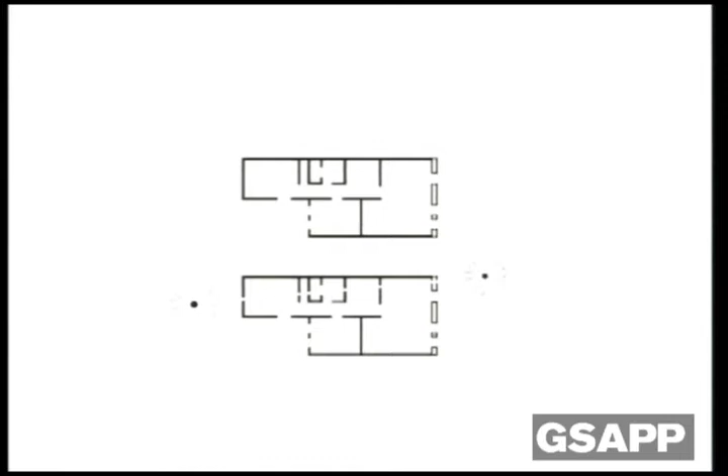I made a hole, 45 centimeters, just some hole that crosses 7 walls, and began to create a different experience with this house that becomes a gallery, and then becomes a new experience through this little hole. So finally you can have these little circles like a painting, but when you're in the center, you begin to have a relation with the different spaces.

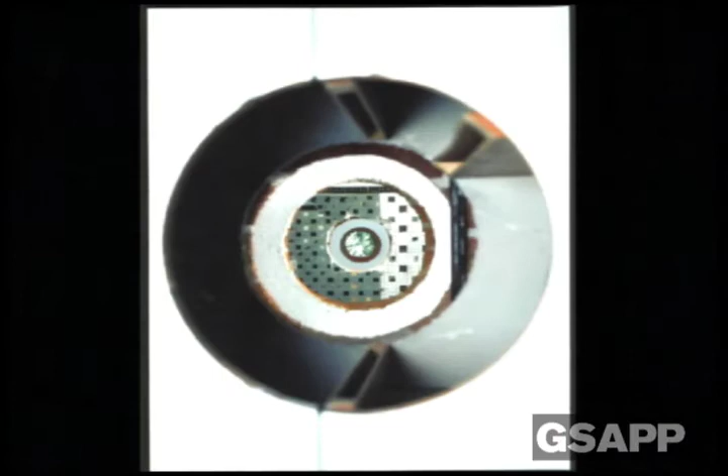The idea is how you can even use the closet or the bathroom and see the tree, and see the different spaces and light in the spaces. The idea is how you can touch, through the view, two different trees, even though neither tree is in the house itself — one is in the street and the other is in the neighboring house.

My first important project came when I was asked by the first government of the city of Mexico — Cuauhtémoc Cárdenas was the first left-wing mayor of the city. He wanted a young man to make something for marginal people in certain places. So we began to work on some spaces with almost no money, but finally, after 5 or 6 projects, he decided to give me a school for the blind and visually impaired.

This was important for me because first of all, it was a big and important project, but more importantly, how can you make a building without sight? How can you work with the other senses? For me, it's important to have a concept for the building, and I began to ask: how can we create effects of smell, of touch,

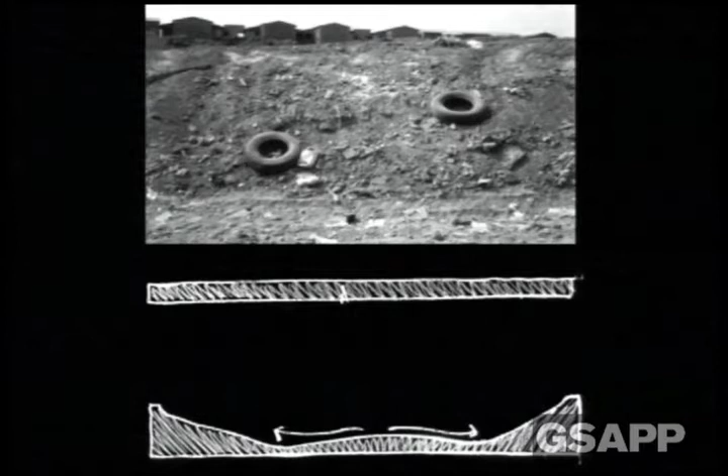So finally we chose this land, here, and we had our first problem. The kind of thing I like to talk about is how we work with a problem — in this case, we had 1 meter 80 centimeters of garbage from other construction. It was like a corrupt arrangement between the people and the government to leave all this construction garbage here. I didn't have the money to remove it all, so I decided to move 70% of the land to create a new territory, a new topography for the place.

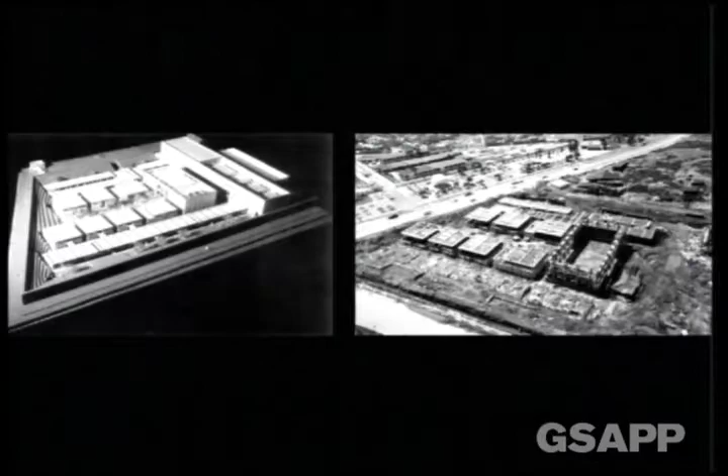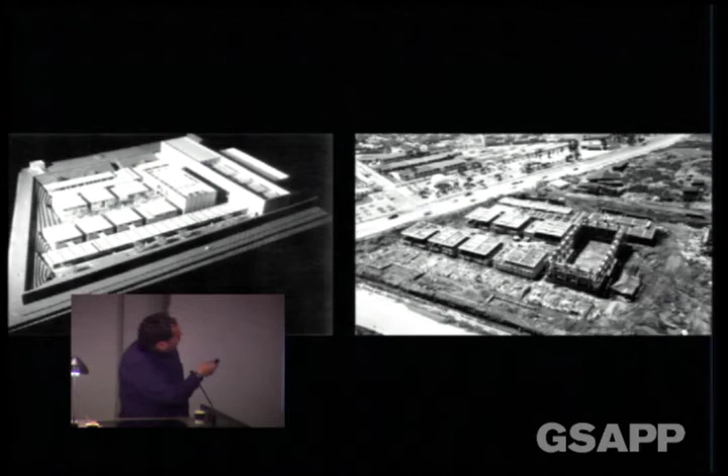So, here is the construction. We made a very big wall with gardens, and built a very rational building. I have to confess that in the beginning, when I made this model, my friends, artists and architects began to say, well, this isn't an attractive model. They didn't say, wow, what a nice building. I was worried, I think so.

But finally, one day, the director of the ONCE, the Organization of Blind People in Spain, came to give money. He was blind, and we took off all the roofs of the model, and with his finger he began to walk through the place, and then he said, oh, nice space.

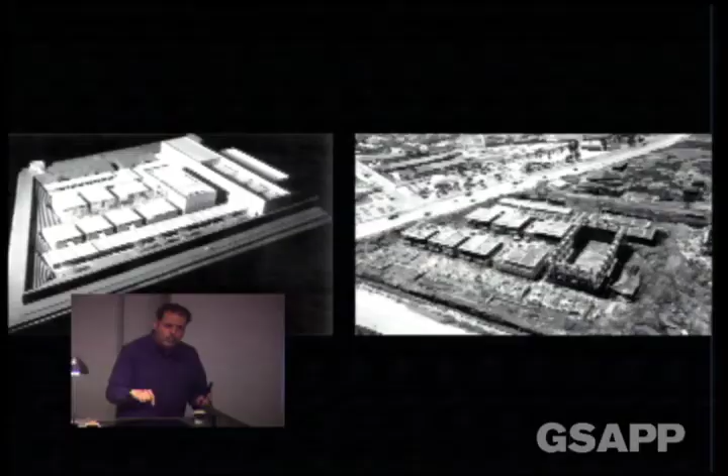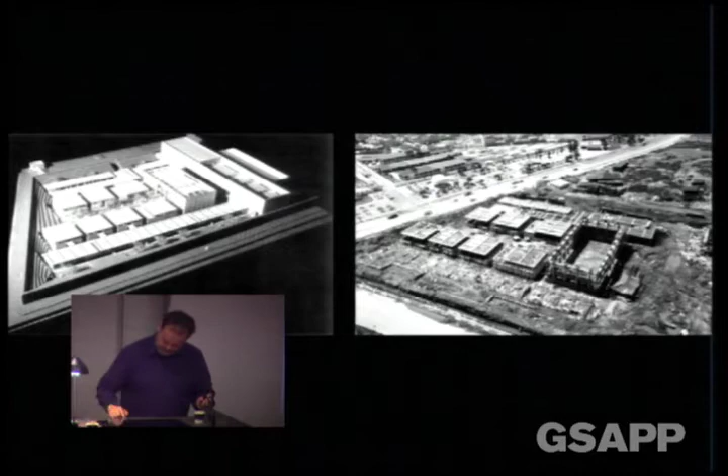He came to view, and here is a patio, and here is a stairs that you can go from one part to the other. So he begins to have experience with the space, and I begin to understand that maybe I was not wrong with my first ideas. So here is the building.

You don't have windows like a traditional building. We begin to work with other materials. Tepetate is a land material, but it's almost like a stone. They use it in the center of Mexico for making houses of 1 or 2 floors, and we use it for 14 or 15 meters high.

We begin to use the condition of some material that is the skin, in this case the tepetate, and the structure inside that you can see. So finally we can begin to use these traditional materials in another way. And the stone, the volcanic stone that is in the floor in Mexico City.

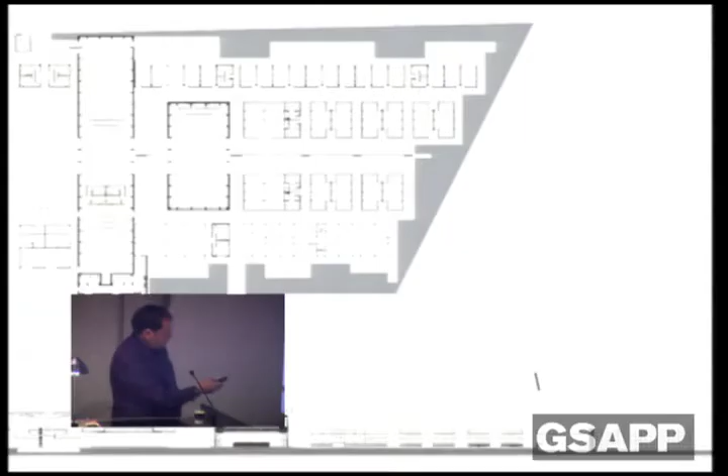I will not talk a lot about the building, but finally it's about how you can really cross and see different spaces, like a very important plaza or patio, and then how they can have their own vegetation and patios. Here you have more of a public space, like a mixed space and a private space, and a sports, cultural, and pool space, like a swimming pool.

And then finally you have this line about sound, because all the water comes and breaks, and sound depends on where you're crossing the spaces.

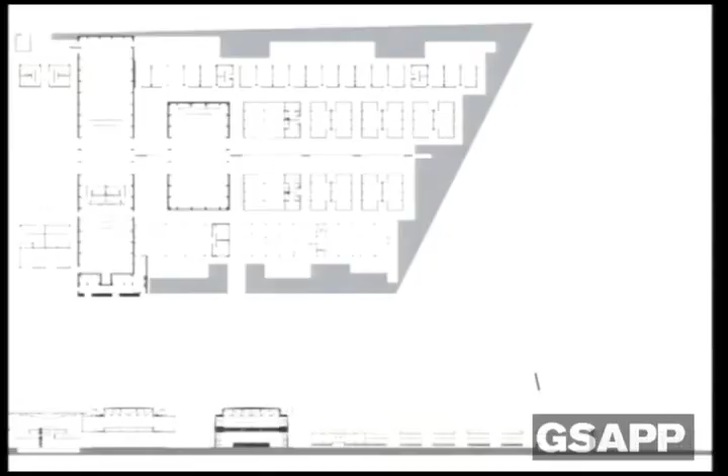The experience, how can we have different textures in the materials with not that much. I love a lot what Louis Kahn says about using not too much materials, and how with only 3 or 4 materials we can make stone, tepetate, and concrete to make the light about different heights and different experience with light and shadows and textures.

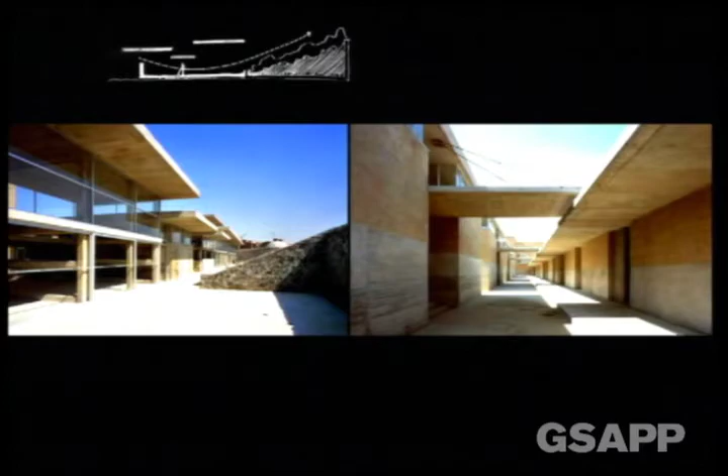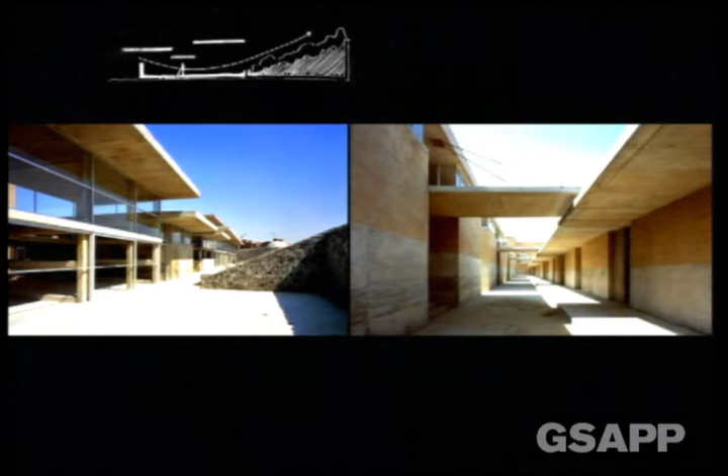That's why we use this kind of different heights, 210, 36, 45, to begin to have this space for the flowers, for the smell of flowers that we have here, and then some kind of skeleton that has more windows when you have this public space with mixed people, family, and professors that can see in this space, and then where all the blind people can have more the education rooms, and then here is more dramatic, the idea about shadow and light.

Here is the plaza, and here we have the water. When you cross, the water sounds, and you know that you can cross where the water sounds. And then you can sit with the shadow of magnolia that has some smell, and just have a good time there. It's nice when I was with all these blind people talking about the story, to be there.

Because they cannot see an image, so it's nice how they say, I like this story. So finally, we begin this with that.

And then how can we make some texture with this material? They can just feel it and don't fall around, because the government says you need to put something here so they cannot get to the water. But finally, only with this texture, they can really stop and know it's not a place to walk.

The idea is about the same roof with 9 columns. In some cases, depending on the programs, you have windows, because here you have a gallery. And here you have the rooms, the workshops, and then here maybe you can have light, but not like a traditional window, and then you can cross air and have the different spaces for the different workshops.

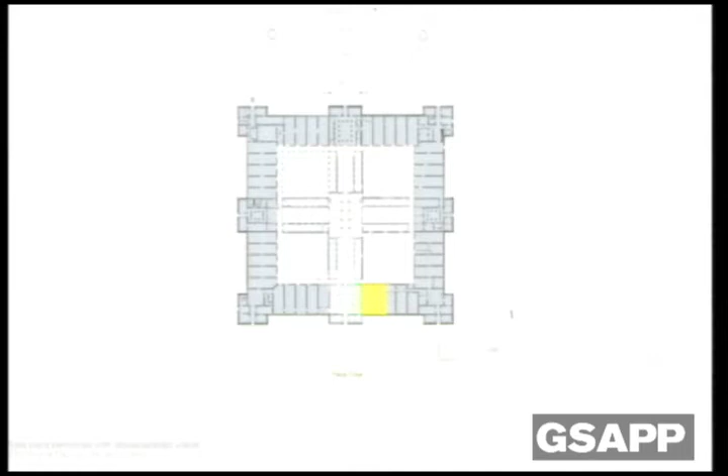This was 10 years ago or more, but later we had a new experience with blind people for a library in a pre-existing zone. It's a building we made, that became a library designed by different architects, making a new experience, and we decided to make these 2 spaces for blind people. This was the first space they had before—it was a terrible condition.

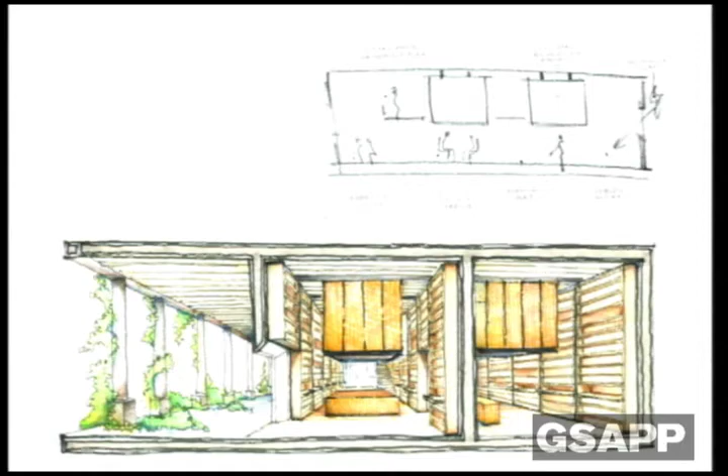So finally, they asked us to make the library, and to not make columns. One more time we make these boxes, so finally the people can be here to make a sound book inside, and then can walk on the first floor. We make, one more time, a garden with the smell that you can hear there. It's important that all the people, not only the blind people, go to this place, and it's a possibility to have a connection between not only the blind people, but all the people who go to all the libraries.

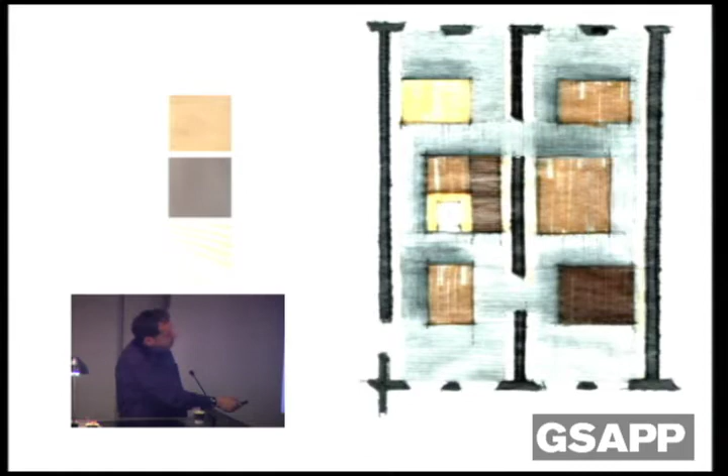And finally, we have this space for blind people. We use different colors in the wood to make a different experience, and then we use yellow—they can really see the yellow. So finally, it's like an abstract painting, but they can really use the lines to help with the steps. And with some braille, they can even read some lectures here. The child can be in some places in the yellow—so maybe the blind child, or maybe the child of a blind man.

And we even made the furniture for the people. And then we used some sound here, because they asked us to make some artist pieces, but finally we only used sound. So we had 9 sound artists make some pieces, so people can really ask to hear the piece, or even hear other poetry or other books.

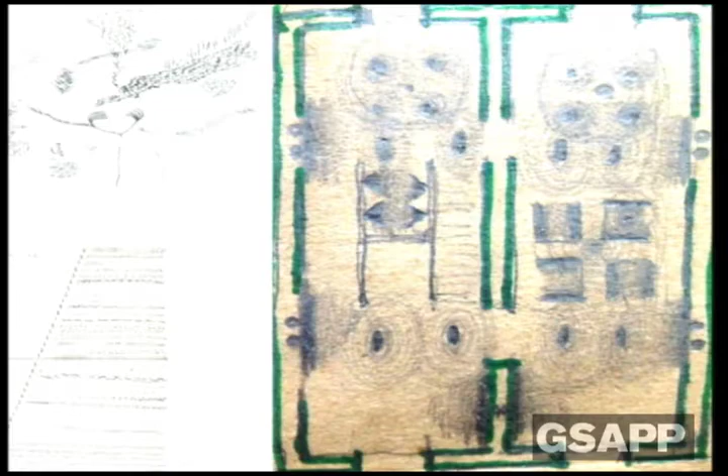They are acoustic walls, and there is the inside—how they really work with sound control. Here are the drawings. My brother is a sound artist, and he was the one who invited other artists to make the sound in different places.

We made an intervention, an ephemeral intervention, in a church that is now a museum. They wanted to put out the floor, because they put this floor in because, in Mexico City, everything sinks down—it's the lake. So finally they said we don't care if we don't have a proper floor, but we need the original floor. And the curator told me I could use this material to make something.

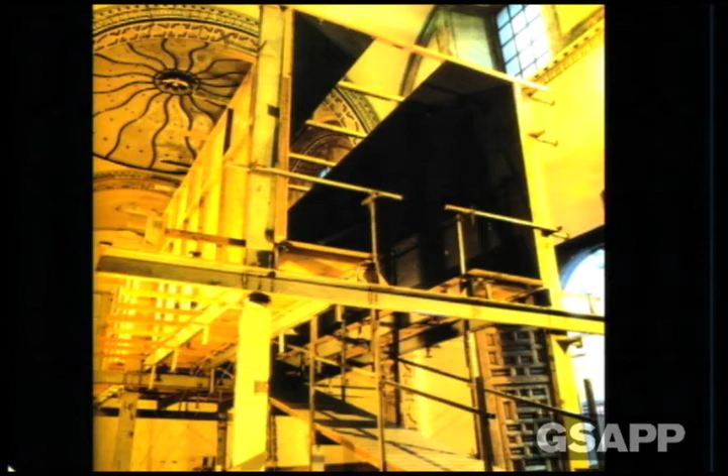So I used the same material, just moved, and in 2 weeks, with the workers of the place, I made a connection between all these pieces, and made these tents to make this piece that people can walk inside and have a new experience with the place. The idea is how, with the same material, even with the same workers—people who just work for the museum—you can make something that works without money.

This is a building we made for a poor area called Milpa Alta. It's a warehouse, and we used the stone of the place, the volcanic stone. The old houses are made with stone.

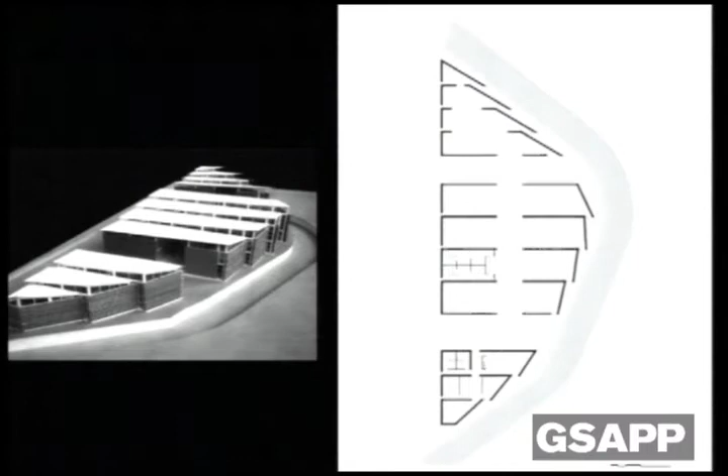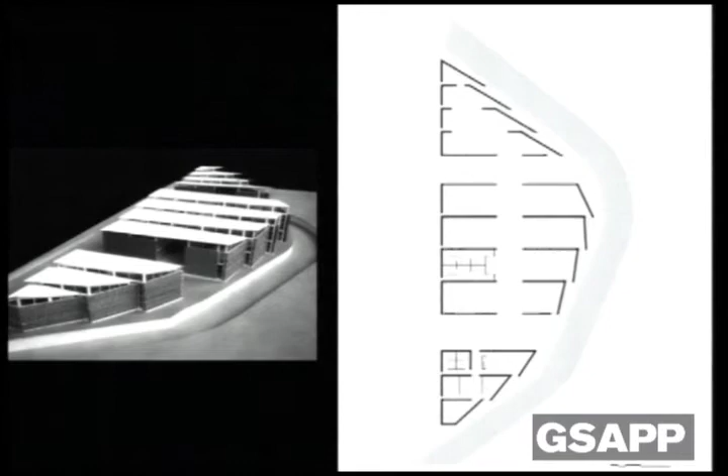So how can we make a warehouse with this material and with light roofs, not expensive, to make a place for the carpenters and painters and the people who work for the municipal place, because this is a water canal. How can we use the most space, and how can we have the north-facing light most of the time? Finally, we used this material one more time.

The skin is important, no matter if the resolution isn't good. The important thing is to recognize some skin. The idea is this is a very chaotic place, everything is changing—this is the sea you can see in the place. So finally you need to make a strong building for that.

This is the interior, and for me this image is very important because of how it works. One is the skeleton, the little vertical points, and then you have the vertical elements that are the stone, and the horizontal element that is the light—the lighting roofs. The light and windows are the connection between all the materials. Finally, you can see how the place works.

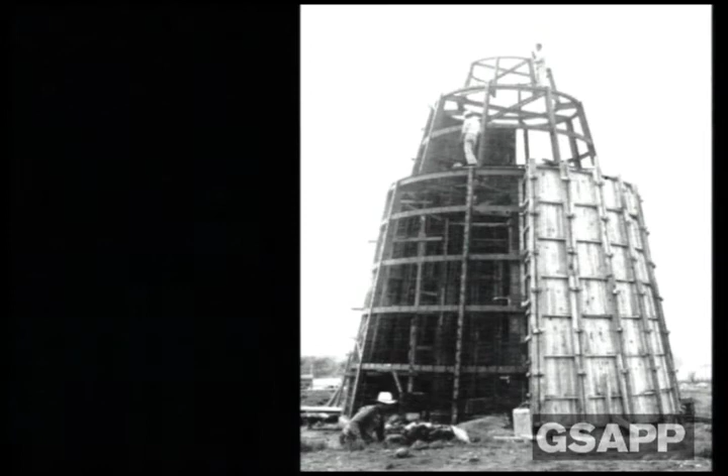Outside you have to be very careful about security. This is not an intervention—this is a photograph of the process of a beautiful sculpture on the Ruta de la Amistad in Mexico City, made by Fonseca, a Uruguayan sculptor. But I loved it, and some curators began to ask to create an artist experience inside the sculpture, because it's empty inside. So I decided to use the same material.

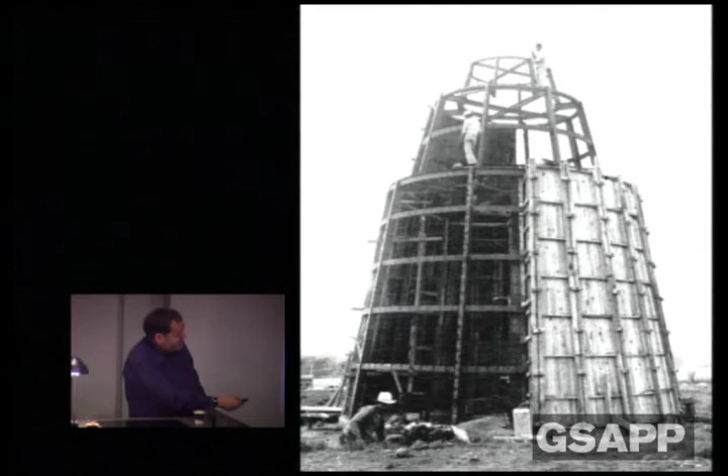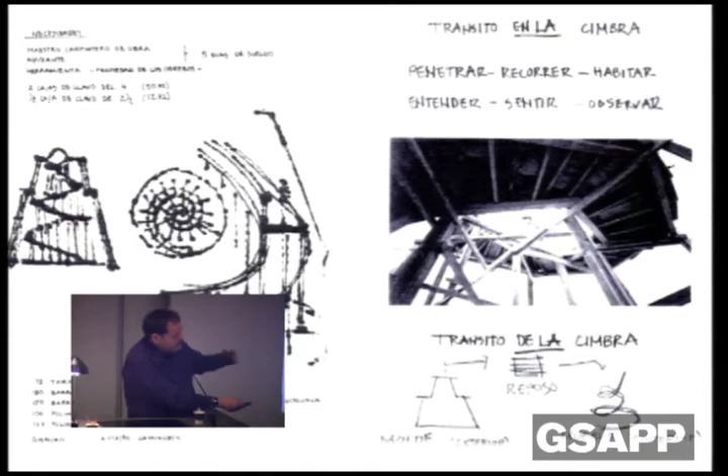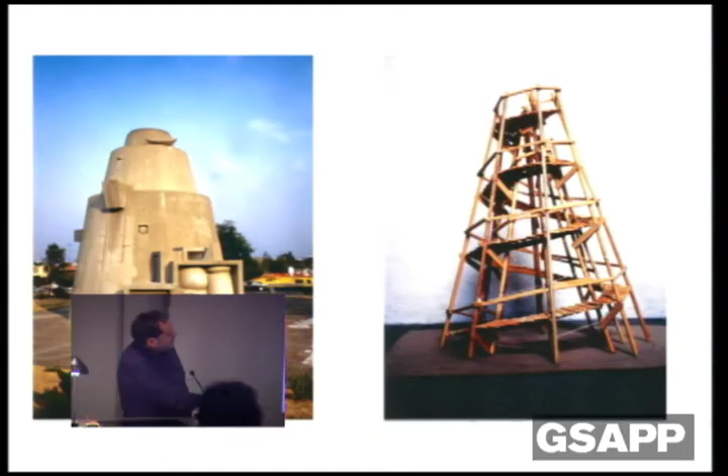I asked a constructor to give me this material, the wood, for two weeks, and he only told me: don't cut it, only use it. Finally, we made a model and built it inside with two people in a week and a half—the opportunity to make these stairs to go to the top, but not only to go to the top. The idea was how to finally have the experience of working inside, and how to make all this happen.

Only the rules—the concept of the rules—and then the worker begins to find the solutions. Because of that, I began to understand that if you have a strategy and concept to make a building, it works. They asked me to make a market, and I decided to make it as a tianguis.

And how can you make the tianguis? This is the place, and the tianguis is about using horizontal platforms so the wind comes through and the sun doesn't get inside. Finally, how can you use 6 by 6 square elements at 3 different heights? If you use 3 different heights, you can even make 10 different models, and it's the same building.

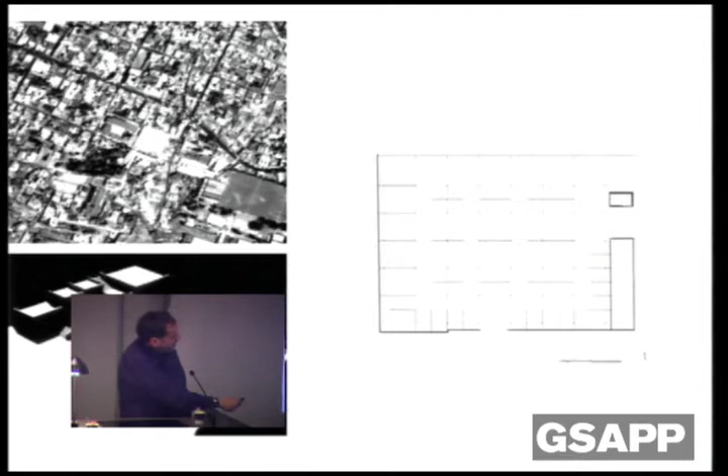Finally we made the building. We only used louvers on the west and the south, but at the same time the wind comes between the northwest and the southeast, so all the wind can come through the louvers, but the sun doesn't get inside. In the east and the north the sun comes in. Finally you can have very nice light.

They don't really need to use artificial light because they have such nice natural light. In the other condition you have these accent roofs, and at the same time you can have this accent in the interior of the place.

It's important to say that even in Milpa Alta, all these informal houses are growing and changing all the time, because people get more money to build up more floors. So finally you have the same vibration between the whole city and the building. So how can you make a contemporary building in these informal zones? It works.

Finally, it's a contemporary building, but at the same time it works with the program and with the texture of the fifth facade of the city.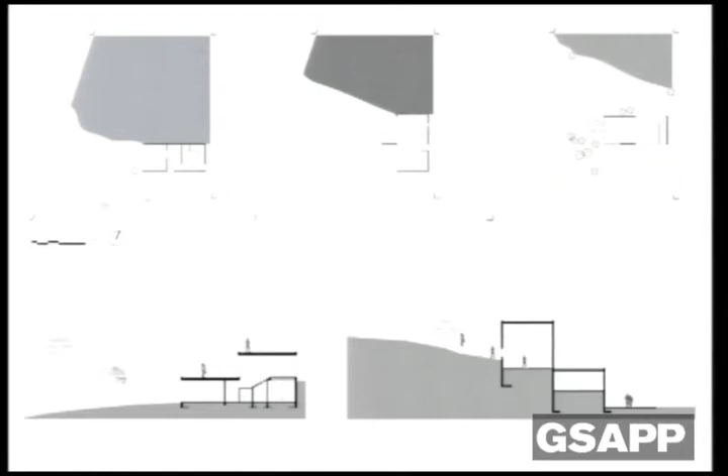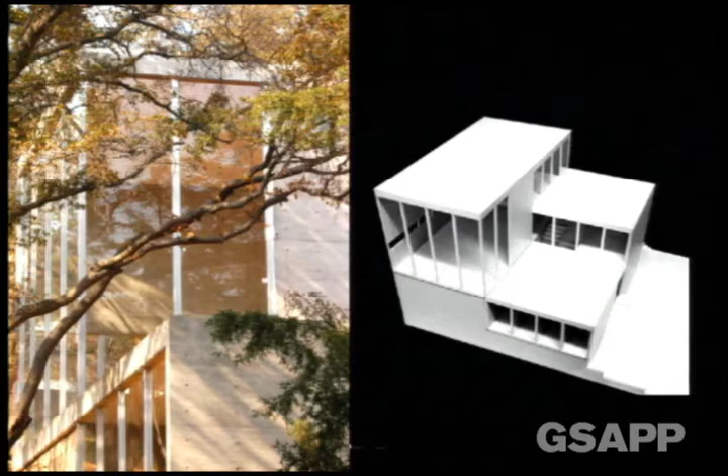Casa Saavedra is a little house we made with 2 materials, only structural windows and concrete. Once more we used a 6 by 6 module, making 3 by 3 steps following all the topography. Finally, we made a house with one modulation, where you can go outside on every roof, really matching the texture of the topography of the place.

The idea is how important it is to make—and to understand—the skin with the skeleton, and how sometimes you can open the concrete and see the elements that are really doing the work of the structure.

The School of Plastic Arts in Oaxaca was created with Francisco Toledo, an important painter who works a lot in Oaxaca. He invited me to make this school at the University of Oaxaca.

This is a rammed earth building. We decided to use rammed earth, working with the same people in Arizona who build for Rick Joy and other architects, and asked them if this earth would work in Mexico. Even in Mexico there are earthquakes, so we had to study how to build with these conditions. Finally, we made it work.

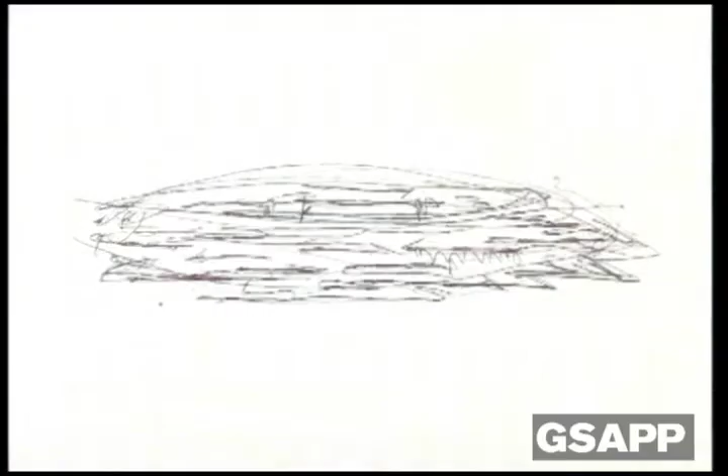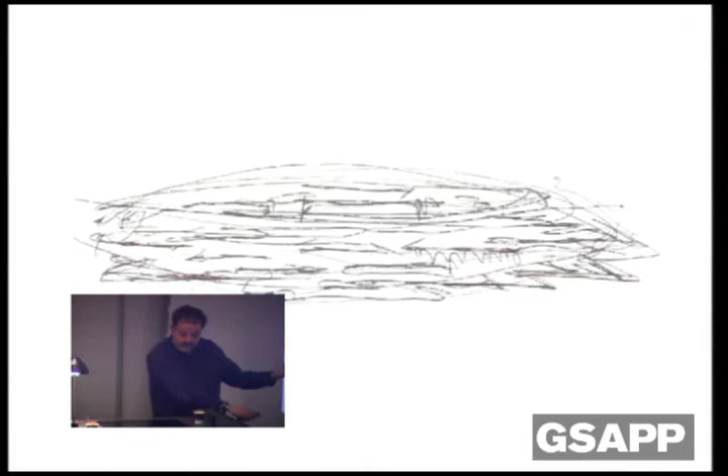This building is 2,500 square meters. Maybe the rules inside the university gave us the opportunity to build it, because if you go to the government, nobody has rules for rammed earth. So what happens in our country is that sometimes we can get opportunities if we convince people, because we have the construction numbers and engineers, we can talk and do it.

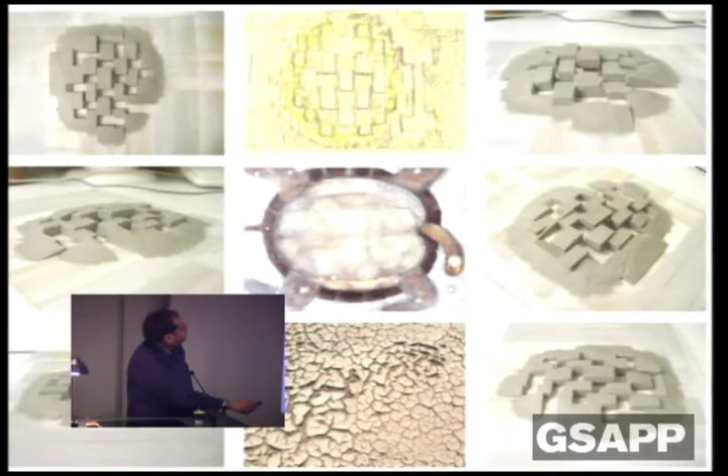We began to understand the school could be made of emptiness spaces and workshops, since we have different workshops. We moved earth again to make a space, and then to make a double space between the studios and the patios. Here is the place, here is our school.

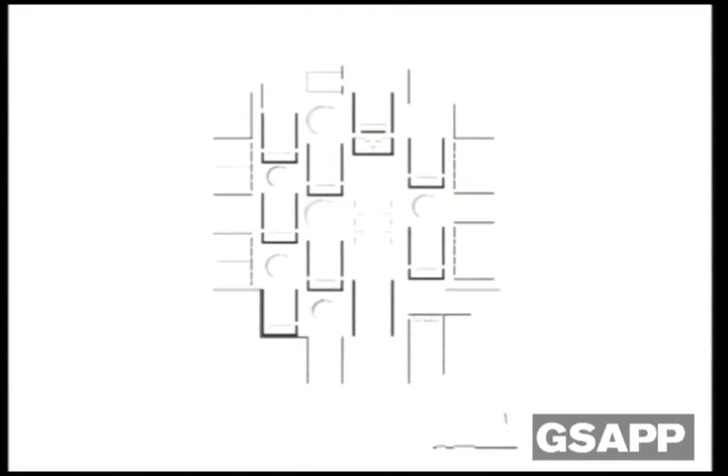You can see here how the place works. It's open to the north. You see this double space with the tree, and you never see the other studio. Air can cross through, giving a very nice temperature, even though Oaxaca is very hot and warm.

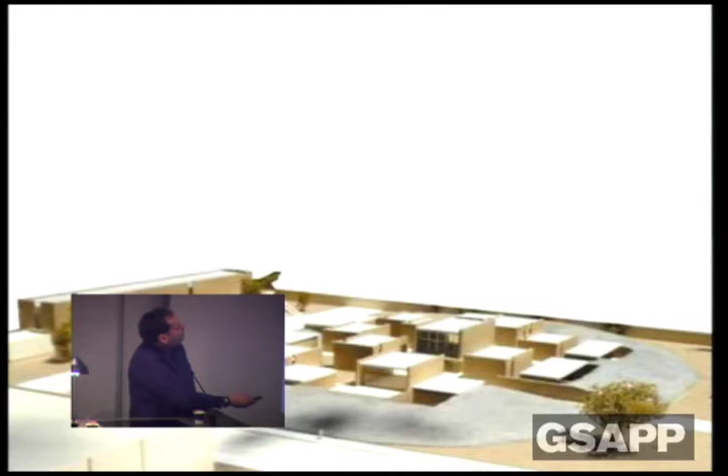Here's the building, and here is the process of how we made it. We used stone from the place to make the buildings that follow these movements of earth, and in the center we made the buildings from earth.

We didn't have all the money at the start of construction, so we convinced them we could make three buildings first, and ask for the rest during construction. We had to use strategies to find money, since in Mexico you find money along the way. That's why in one year we finally designed and built the building.

Here you can see how the construction of the place worked over that year, and finally you have the school.

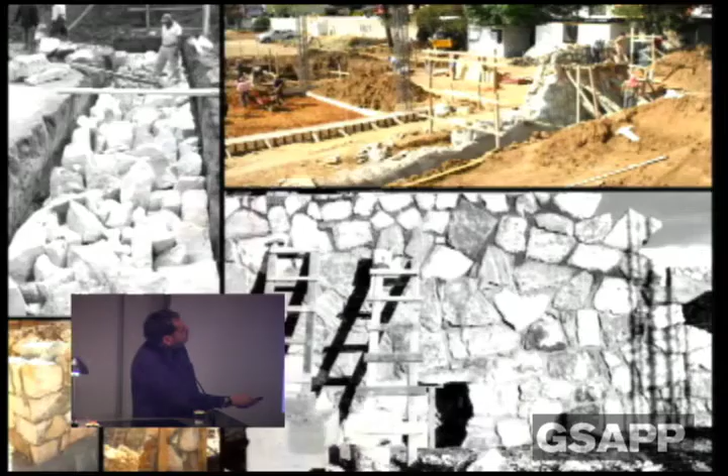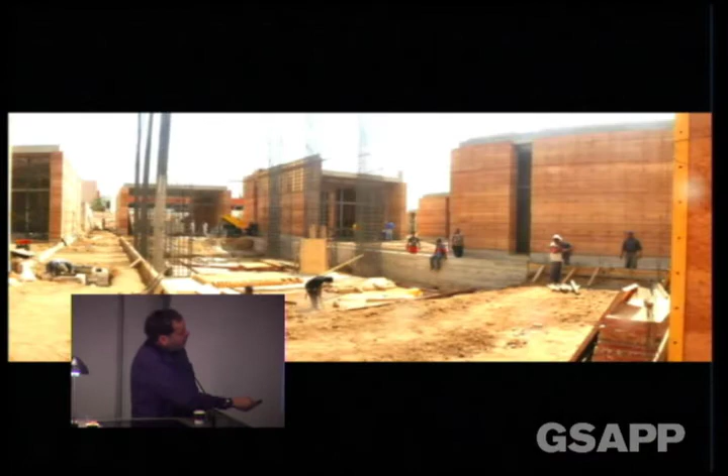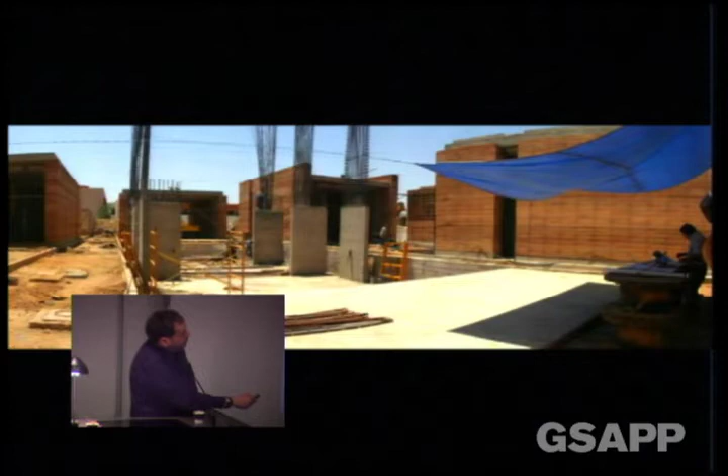As I said, we used rammed earth and stone. The principal building is in the center. We made a hall, speaking more like Monte Alban, creating this negative space. Then we made concrete walls to help with earthquakes, and made a new roof.

New walls of rammed earth on top. The idea is how you can make a construction system where very heavy walls of traditional conditions can work under gravity conditions.

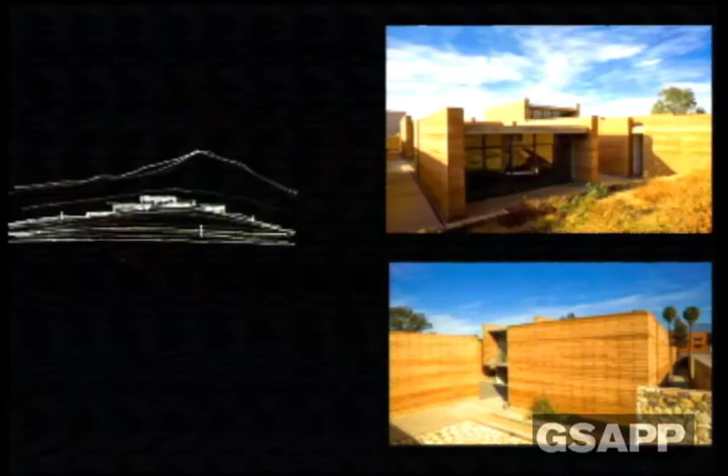But the more important thing is the experience—how you go inside, even from the topography, to see the building. You can walk from the topography and come to the different spaces. It's important, the contrast between light, shadow, the blue of Oaxaca sky, and the material, which gives you the profundity of the material and the process of how it's made.

Finally, we used concrete and rammed earth, no other material. Then, how you have different experiences with shadow—because we don't want the sun for people outside—and how every patio with one tree gives a different experience as the shadow moves all day, and how it works with the rammed earth material.

It's important, and we see in Casa Saavedra how the windows work as a structure. You have all these walls here in stone, here in rammed earth, and then only this roof, but it's simple, put simply there. I mean, you don't have a real connection between the roof and the walls—you can see here.

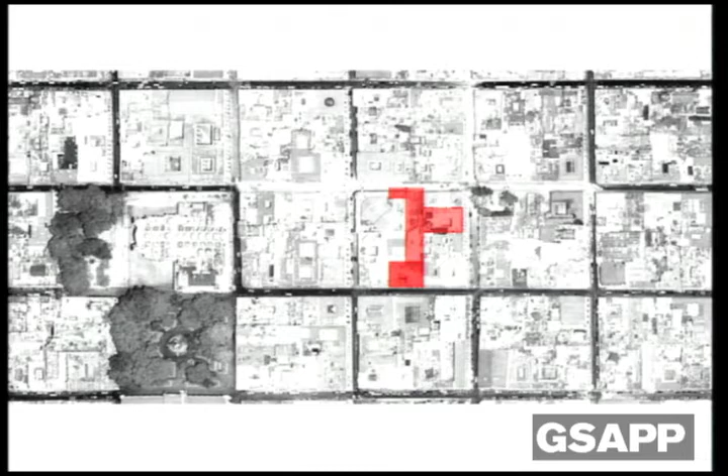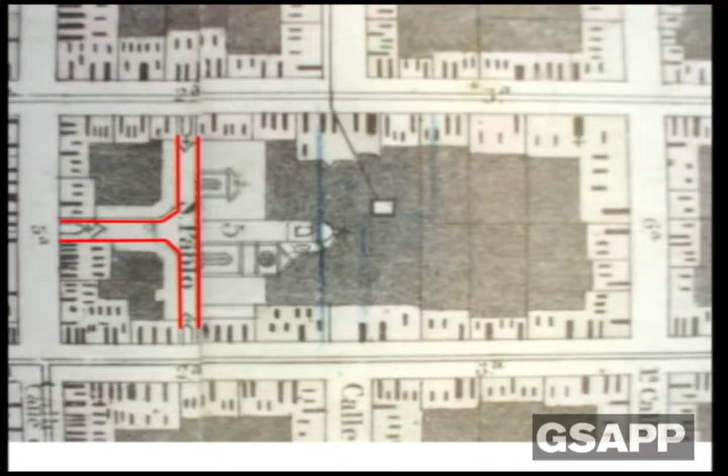There was a hotel there, and you never saw the construction of the convent - you only saw many other constructions. Here is the facade of the 19th century hotel, and you never knew that behind here was a convent. We found historical drawings showing the historical convent of the 17th century, with a walking space between one street and another. Here is the persistence of the ruins of the convent, because in the 19th century, in the age of Juarez, they put in this street and broke part of the convent. So finally, because they didn't have all of the convent, they began to make construction inside to accommodate other programs.

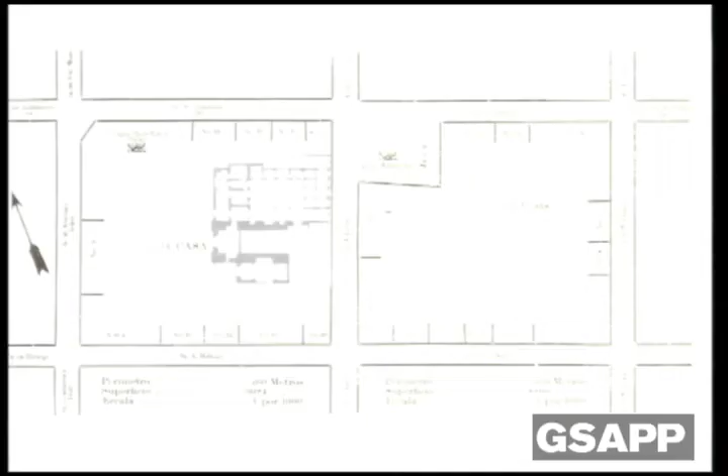Unfortunately, they began to buy the properties and made empty spaces here. This was like a parking place inside the block that was the facade of the convent. We began to take out the materials of the new buildings, and then finally we made the restoration of the building. But my client asked me to make contemporary architecture as part of the program. He said the square meters that I took away, I needed to add back for the program.

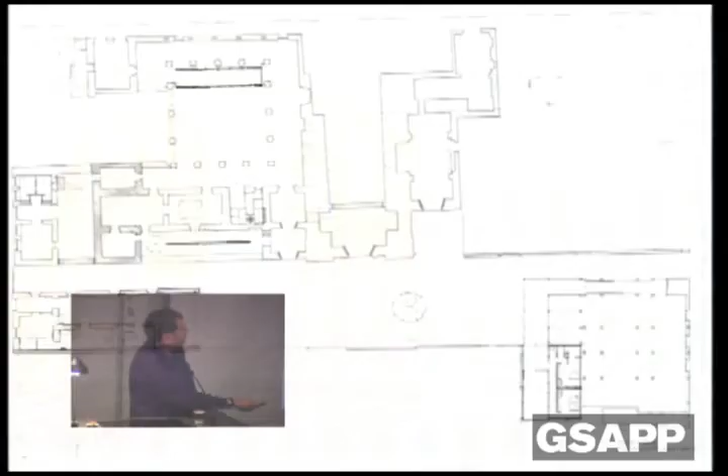So finally, I only had the walking space of the convent. So I made like an acupuncture intervention with a non-heavy material to create a library. This is the 17th century building, and then in a 20th century building I made another intervention. Because we had made empty space here, we made another building, the same acupuncture of contemporary architecture, to make a gallery. And then in the 19th century building, which was a house, we made a restaurant. Once more we made a new addition to connect, with 21st century design, the connection between all the centuries.

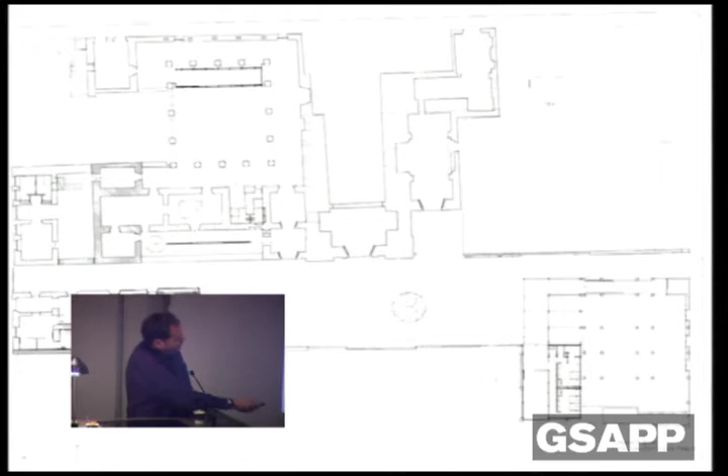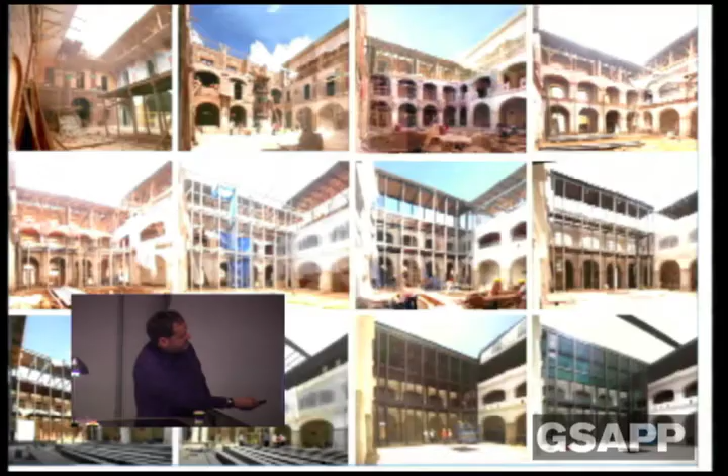And here is a place - in a private space, we made a public space. Now in Oaxaca, everybody can walk in this space. We made different patios in the pre-existing spaces. And here you can see, this was the hotel. We began to take out all the walls of that hotel, because there was just a little patio.

We came to understand, in another layer, the other patios, and finally put in the new structure to make a contemporary building, but very transparent, so you can see the old building. So finally, you can see the building, but on the other hand, you can use part of the patio for the library.

You can see here how it was in the beginning, and then how finally we made the building. There was a lot of people involved, historical reconstruction specialists, many people working on this project. You can see here the process, and then finally they have 3 floors. We took out the last floor, and then with new technology made a very lightweight roof to create a place to use on top.

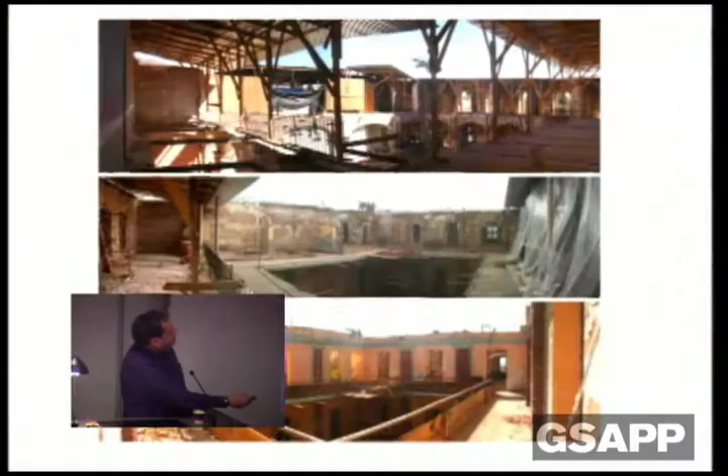And here is the library. It's nice because you have the pre-existence, the new part, and all this new space together. And then on top, you can open and move this roof depending on the moment of the day, because you can manipulate it to never have the sun inside directly.

Here you can see it's open, here it's closed. We used a new fountain where the pre-existing fountain was, and we used obsidian, which is a black stone, with a little water to make it like a mirror. You can see here.

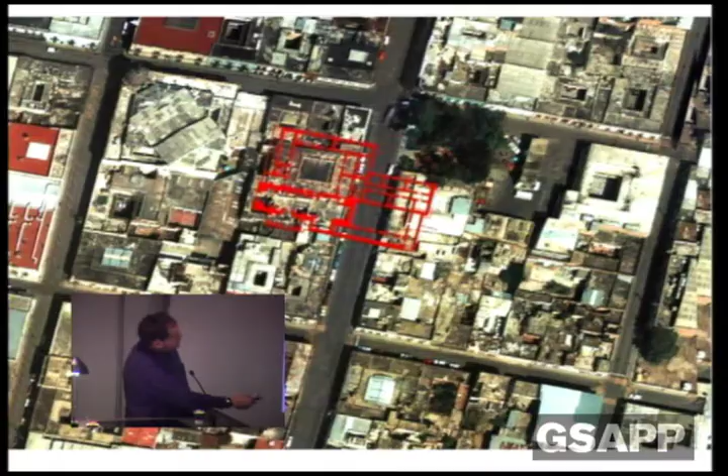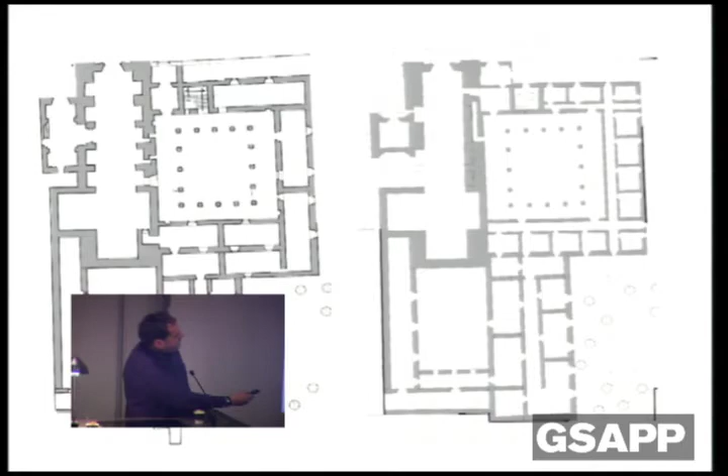This is the polemic part, because finally we have a break. They make this street, and we found that even when they are making this street, we have this persistent 19th century element. This is not anymore a hotel.

We need to find that this was a convent. We cut the convent and found that finally we have to understand the cut between the circulation part of the patio and the rooms of the 17th century building. That's why we decided to use a more abstract and new facade that is contemporary, but at the same time talks about the moment of the cut.

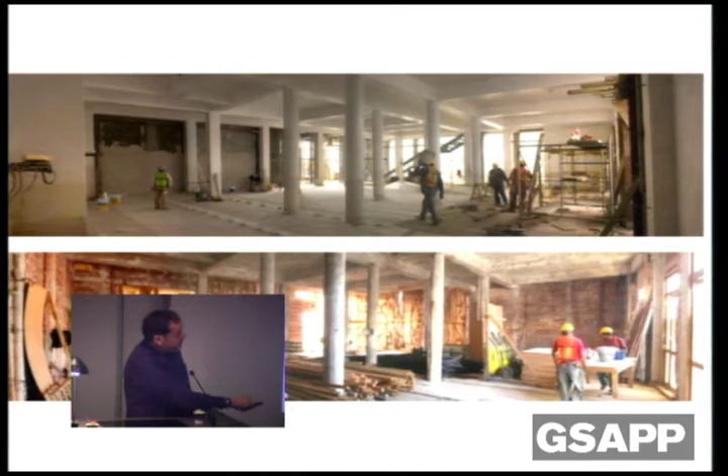This was another very poor building that wanted to be colonial, and we only changed it, but in this case we wanted it to be without protagonist. Inside is a very nice and beautiful contemporary 20th century place, so we only cleaned it to change it to a gallery, open to the place. Finally we put the new building to open one more time the building to the new space.

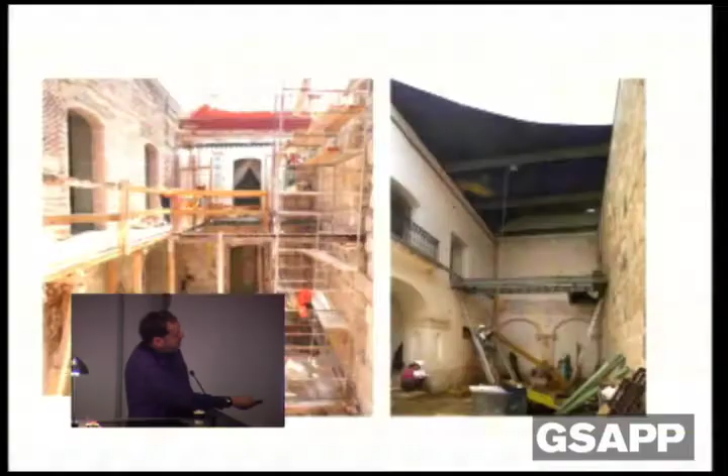On the other hand, we have this little house to make a restaurant. So finally, we make a roof to create a shadow for the restaurant. And then, how can you make a deconstruction when you go inside and make a contemporary space to create a portico to see the space, or the connection between the convent and other buildings?

We have to one more time take away some part of the building to make the connection and to let you see once more the wall of the convent. So finally, that's how we begin to make all these different spaces.

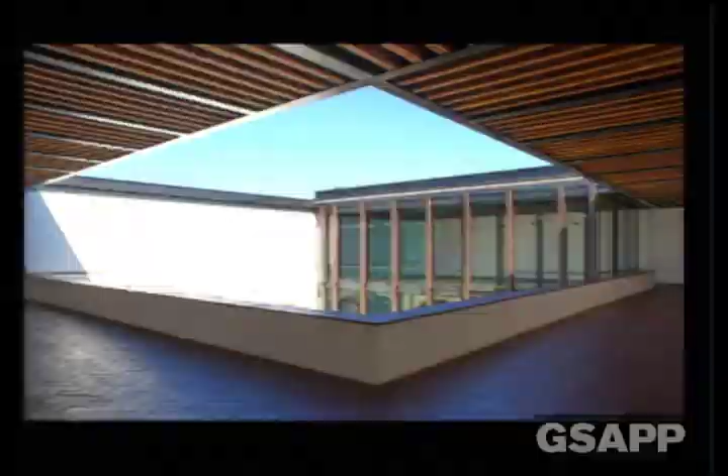It's important in Mexico because most of our historical buildings have very strict rules, so nobody can use them. With this kind of building now, they know that with acupuncture, with strong contemporary architecture, you can really change and make new programs for many buildings in Mexico. Many people have these buildings in Mexico and don't use them, and let time go down because they cannot do anything with them. But with this kind of new rules, they can really change the programs for the projects. They use it a lot. This building has very good energy.

I will talk about the Sound Pavilion. It's a little place. They asked me and my brother to make a piece of art, because there were 7 contemporary artists making something in a museum of Ricardo Legorreta. But because I am an architect, they said please go outside to the garden to make your part.

They told me, why don't you use this pre-existing zone, that was like a shooting practice area for soldiers long time ago, to make the building of the Sound Pavilion. But I found this wall, and I found this tree and these stones, and I said this is a better place to make the pavilion.

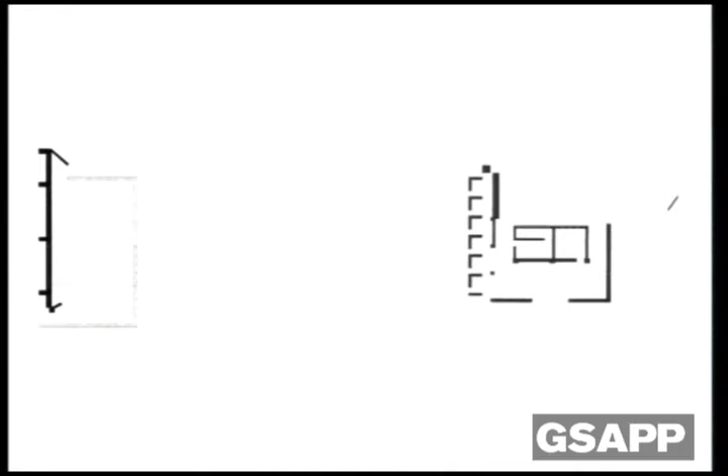I only had $40,000 to make the building, so I could only make this wall, a roof, a shadow, and the speakers for the sound that my brother makes with the sound of birds, to make only a place to think. And some little holes for our children, for tall men, and for many people between the stones, so you can even see the landscape outside.

Finally, it's almost the same as the pre-existing wall, but with little elements that let you know it's a new building. Once more it's the idea that some people say, I didn't see your pavilion because I only see some stone walls. But I prefer sometimes to take that risk.

Because if you can see this wall and understand that this is not the same wall, that this is the pre-existing wall and this is a new wall, and then you go inside and see the shadow, you begin to hear the sound of the birds made by my brother, and then you see that you have only a place to sit and little holes of light. You can have a new experience with the place.

And finally, once more, the pre-existing is not only that wall, it's the tree, it's the two stones, and how we, with contemporary architecture, can make with only three elements a new experience with the space.

I have finally three different buildings that we are working on now. Here we're working in Ensenada, close to San Diego. It's a beautiful place. We are making some different buildings, and then later we invite about 50 people from America Latina and the United States, maybe of my generation or older, to make some buildings and houses.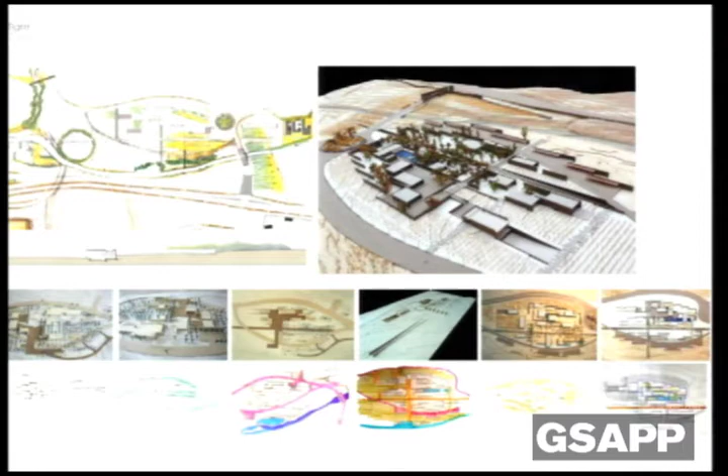And we are making now the first buildings. This is the first place we are working, as a winery, and some other places where we will work. It's something that is growing up very slowly. Here is the winery. It's a place we needed to put down into the ground because of the temperature.

Finally, we use one more time three materials with a little light. Here is the place between the viñedos. How it works is with gravity you can make the wine with the right temperature. And the important thing is how you can regulate the light of the place. Some views are a beautiful place.

And then they asked us to make a little nomada hotel. So finally we use some tents and some boxes of wood to make a hotel in the place. That is now well done. Many people go there, and we are making a new hotel.

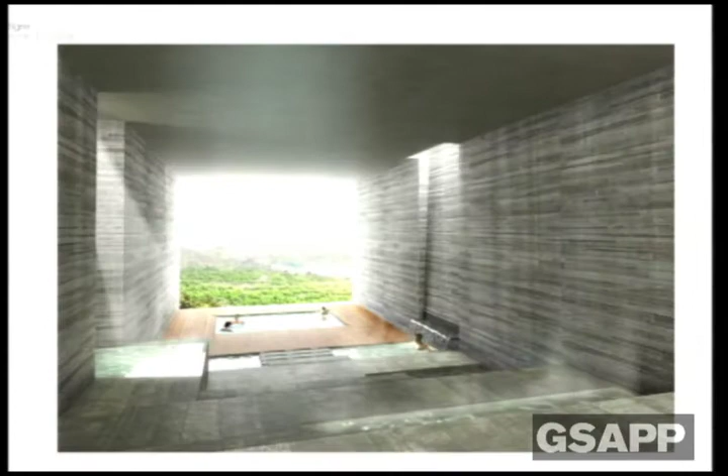This is some renders. I don't like to show renders, but finally we are making some swimming pools, and the connection, the topography with the stones of the place.

And we make this because they began to make weddings in the place. They say we need 4 bathrooms for men and 4 for women for the weddings. So we decided to make something that begins to be part of the winery and the little place we're working in.

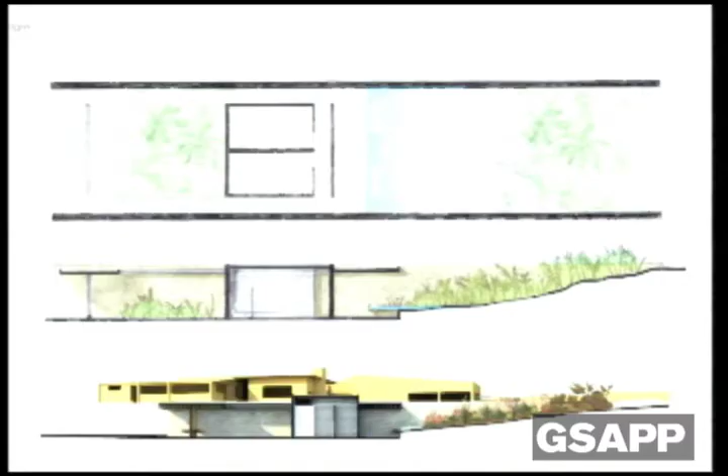So we use the topography one more time. We make a patio, and finally this is the part of the bathrooms, and you wash your hands where the water can make a sound here. We use some plants, water plants.

And then here you have the experience. How can you walk in some places? You can go up to the new buildings we will make later, a place to sit before you go to the bathroom. One more time, the experience about this.

Here it works as a structure, but at the same time it works with the light. You have a patio and an experience with the water at the end.

So finally, if you make a bathroom, it's a very modest program, but at the same time you can begin to make a new experience with the opportunity you have with the client and the place. And when you are at the top, you are not seeing the bathroom, you are seeing a garden of water with some sound.

In process, and finally, we are making some courts in Michoacán. Michoacán is now a very problematic zone, a violent zone, narcotraffic zone, and they asked us to make a court. Before, they had no talking courts. The experience was more terrible.

So when they said we will begin with the open courts, we said why don't we make courts with gardens and with patios? So we made this, it's almost finished. It's in Pátzcuaro, Michoacán. We use the stone of the place.

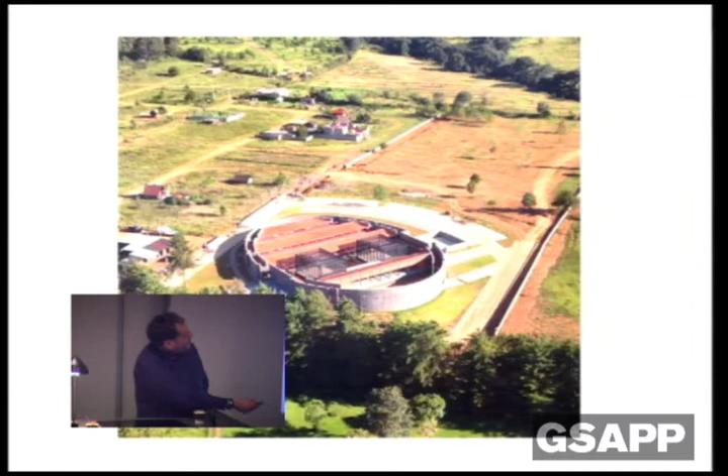So they asked us to use the teja, some traditional materials. We said no problem, we can one more time use the traditional materials to make something with them. And finally, inside, the idea is how can you have an office where they walk to go to the court, and then have some experience depending on where you are in the place.

Even more and more, we are working with light. For us, it's very important, how can you make, as a photography, the material open more and more, or closed, to have the light in the material.

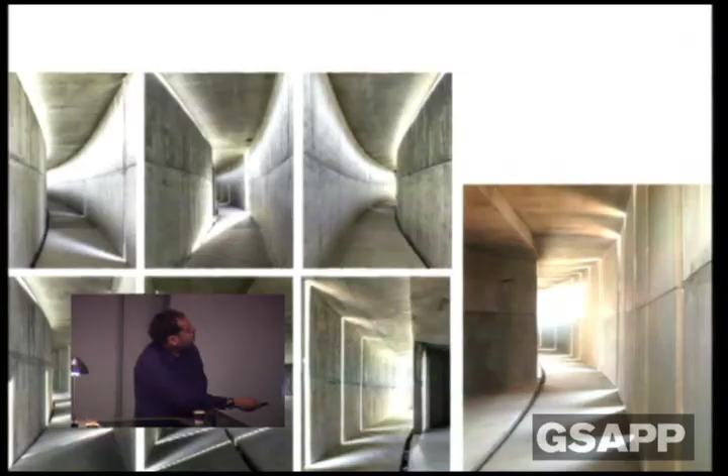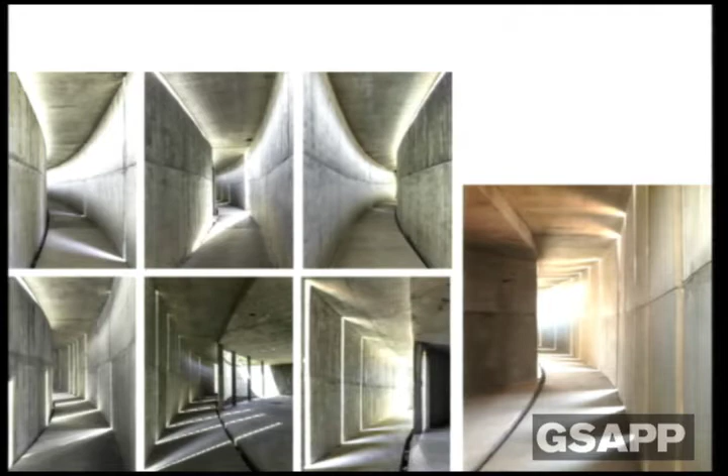This is another court. I only want to show how we are working. The people going to the court can come here but cannot go outside. Still, they finally have some experience with the place. Not only if you are in prison or going to those kinds of places, you can make experience with light, with the space. So that's what we are thinking.

Finally, I am making the studio for my mother. She had a house that I made 25 years ago, but she said, I need an archive to make my studio. She bought 100 square meters, which is a short piece of land that you can use in Mexico to build something, 80 meters from her house. She wants a brick tower, she said, I don't want to see outside, but I need a nice space to make my studio with my things.

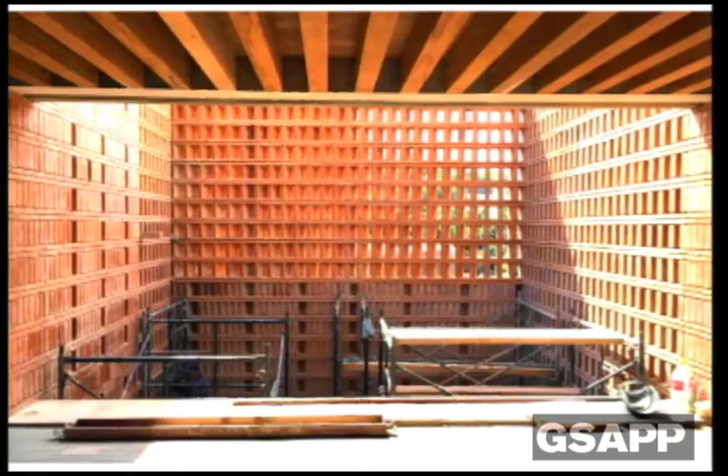So we decided not to use concrete. We used some tents to make the celosía of light. Here is the process, and then you have 3 floors. Only along the line of the land we put up the brick, and we open the brick only where you don't have houses behind.

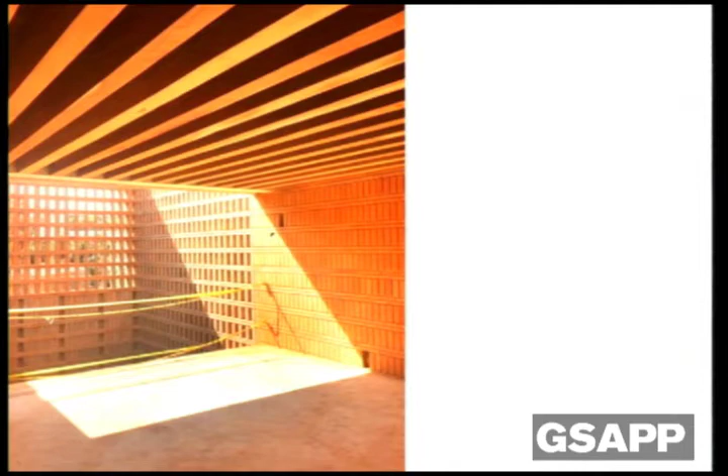And finally, it's like a tower, but finally you have 2 patios inside. You have experience with light, one more time. Here in the back is the light. So with this idea, you have the space open to 2 patios, and a new experience. That, one more time, is important.

We made this brick in Cholula, which is very close to Mexico City, 2 hours away. It's cheap in Mexico to make that. The hand of Mexico, we can use it. These workers never worked with brick before, but they learned in 1 month, and finally made this in 6 months, to make a small space but with very important opportunities using the traditional materials we have.

So finally, the only thing I want to say is how in different projects we use different materials, but the idea is how these materials can be changed with new technologies, with new engineering opportunities, to find the reconstruction and to make some dignity of the space, depending on the program. Thank you very much.